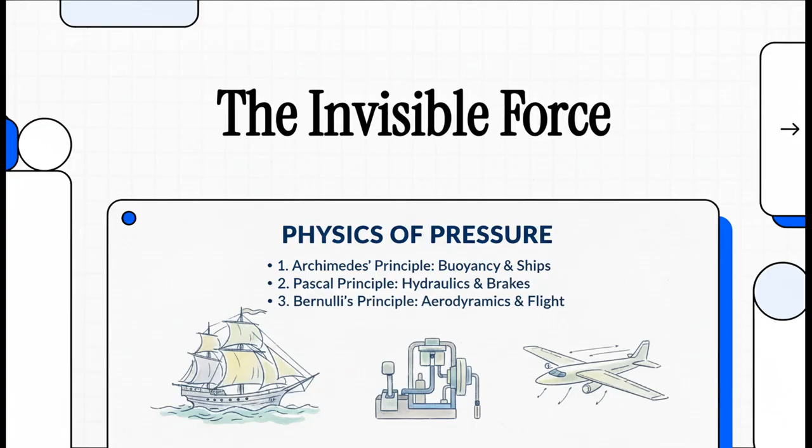Which brings us to this mind-bending question. I mean, seriously, how does a jumbo jet weighing hundreds of tons lift itself into the sky using nothing but air? It seems impossible, right? Well, it's not magic, it's physics. And by the end of this, you'll know exactly how it works.

Now, you'd think to understand flight in the thin air miles above us, we'd start in the sky. But nope, our journey actually begins deep underwater, because it's down there, where you can practically feel the weight of the water, that the basic rules of pressure become crystal clear.

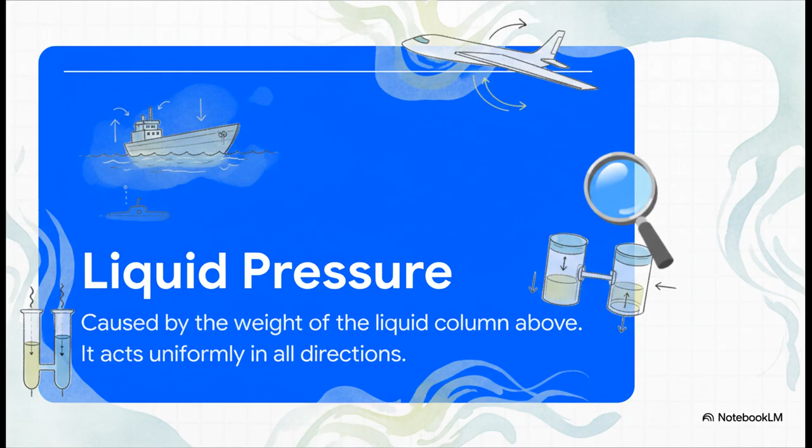So what is liquid pressure? Well, just imagine it as the weight of all the water in a column directly above a certain point. But here's the wild part. That force isn't just pushing down. At any single point, that pressure is pushing out equally in all directions. Up, down, sideways, you name it.

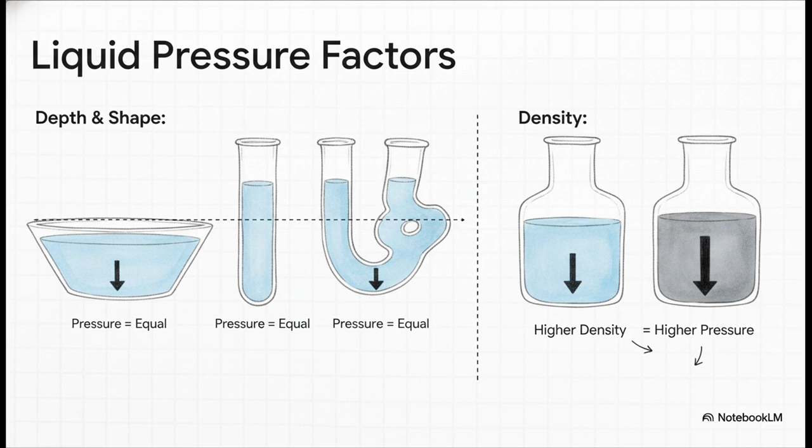Now, what's really fascinating is what doesn't affect the pressure. You'd think a huge lake would have more pressure at the bottom than, say, a skinny little tube of water, right? Wrong. It only comes down to two things: depth and density. Go deeper, the pressure builds. Use a denser liquid like mercury, and the pressure goes through the roof. The shape of the container, totally irrelevant.

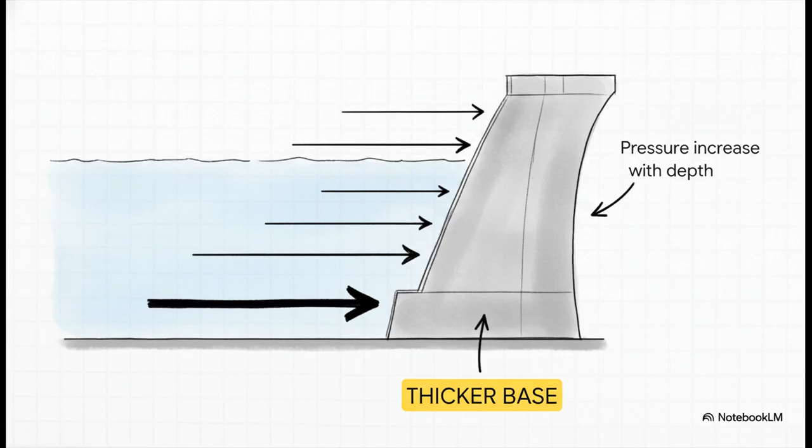And if you want a perfect real-world example of this, just look at a dam. Because the pressure gets so much stronger the deeper you go, the force pushing against the bottom of the dam is just immense. That's why engineers have to build them way, way thicker at the base just to hold all that water back.

Okay, so we have established that water has weight and it exerts pressure. But that kind of creates a puzzle. A tiny little steel bolt will sink to the bottom instantly. So how in the world can a massive ship made of thousands of tons of that exact same steel just float on the surface? The answer comes from an absolute legend from ancient Greece, Archimedes.

His big idea was actually pretty simple. When you put an object into a fluid, that fluid pushes back. We call this upward push the buoyant force, and its strength is exactly equal to the weight of the fluid that the object moved out of the way.

So it's really a tug of war between two forces, the object's weight pulling it down and the buoyant force pushing it up. If the object's weight wins, it sinks. But if the buoyant force can perfectly match the object's weight, you get a stalemate. It floats. The genius of a ship is its shape. That huge, hollow hull displaces a massive amount of water, creating a buoyant force that's strong enough to perfectly balance its own incredible weight.

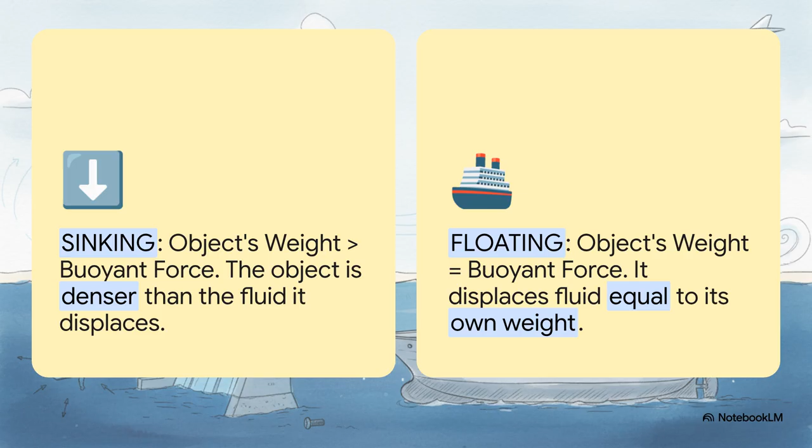All right, so we've conquered floating. Now let's move on to something that feels like a straight-up physics magic trick: multiplying force. How do you turn a small, weak push into an incredibly powerful shove? Well, it's all about our next principle of pressure. I mean, think about this for a second. How can your foot, with just a gentle push on a pedal, bring a 2-ton car to a screeching halt? You don't have super strength, but your car's hydraulic system, it kind of does.

The secret is something called Pascal's principle, and what it says is that for any fluid in a sealed system, like the brake lines in your car, if you apply pressure at one point, that pressure is transmitted instantly and equally to every other point in that fluid, no loss of power.

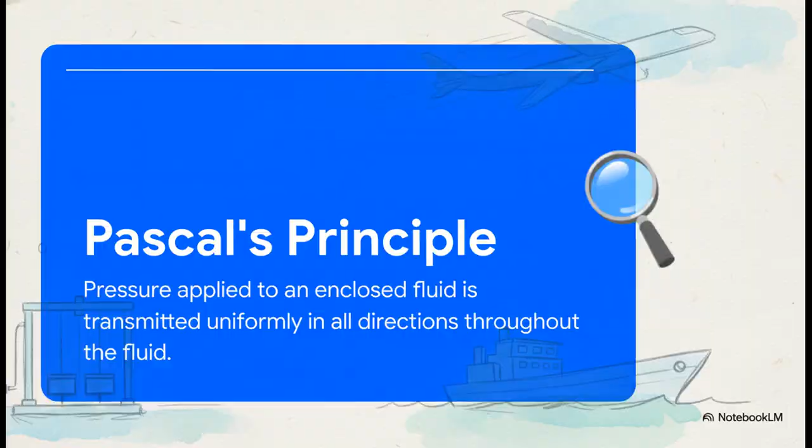And this is exactly how your brakes work. Your foot pushes a small piston, which creates pressure in the brake fluid. That pressure zips through the brake lines to much bigger pistons at the wheels. And since pressure is force spread over an area, that same pressure acting on a larger area creates a way bigger output force. It clamps the brake pads down and stops the car dead in its tracks.

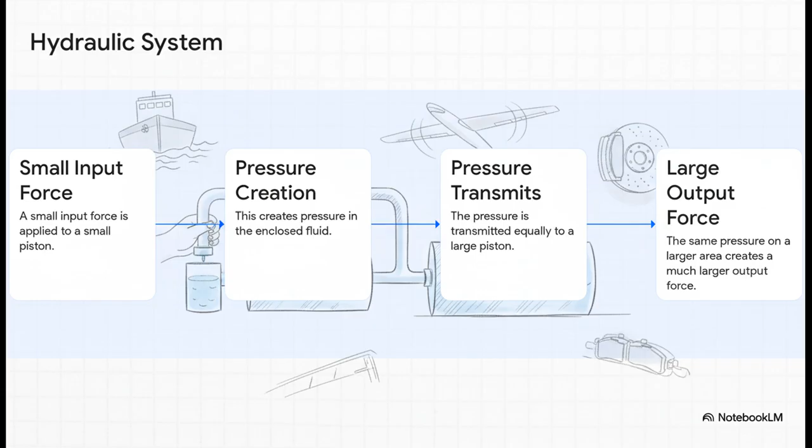This is the whole point of hydraulics. They are incredible force multipliers. A small, easy push from you can be amplified 10, 20, even 100 times on the other end. This is the powerhouse behind everything from a simple car jack to those giant construction excavators.

So we've mastered pressure in liquids, we've multiplied force. Now, let's take that knowledge up into the air. It's finally time to answer that big question we started with. What is the secret of flight? All right, the key to flying is Bernoulli's principle. And honestly, this one can bend your brain a little, so stay with me.

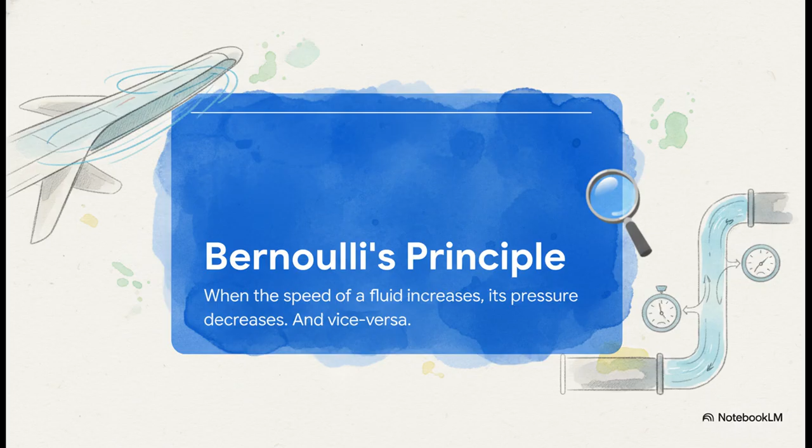For any fluid, and that includes air, it all boils down to this: the faster it moves, the lower its pressure becomes. I'll say that again. Fast-moving fluid means low pressure. Slow-moving fluid means high pressure. And an airplane wing, or an aerofoil, is basically a masterpiece of engineering designed to exploit that fact.

See how the top surface is curved and the bottom is flatter? That shape forces the air flowing over the top to travel a longer distance, which means it has to move faster than the air underneath. So what do you get? Faster air on top creates a zone of low pressure. The slower air below creates a zone of high pressure, and that pressure difference results in a powerful upward force. That, my friends, is lift.

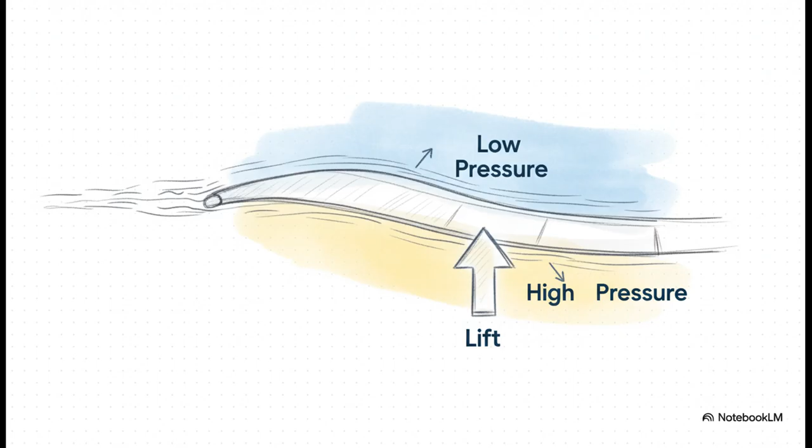And if you want the absolute best proof that this works, just flip the wing upside down. What do you get? A race car spoiler. Here, the goal is the complete opposite of lift. By making the air underneath move faster, you create high pressure on top and low pressure on the bottom. The result is a powerful downforce that literally glues the car to the track for better grip. It's the exact same principle, just inverted.

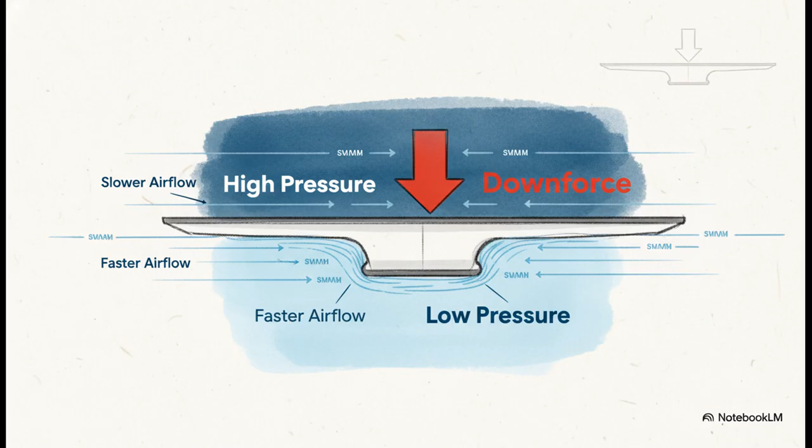Now, a lot of people make the mistake of thinking the low pressure above the wing sucks the plane up, and that's not quite right. A much more accurate way to think about it is that the high pressure zone below the wing is actively pushing the plane up toward that area of lower pressure. So lift isn't a pull from above, it's a powerful push from below.

So we have floating ships, we have hydraulic brakes, and we have airplanes that fly. Three totally different applications, but they are all connected by one constant overarching force that affects everything in our world. And that force is atmospheric pressure. It's easy to forget, but we are all living at the bottom of an invisible ocean of air. And all of that air, miles and miles of it, has weight, and it's pressing down on everything, all the time, with incredible force. This is the stage on which all these other principles play out.

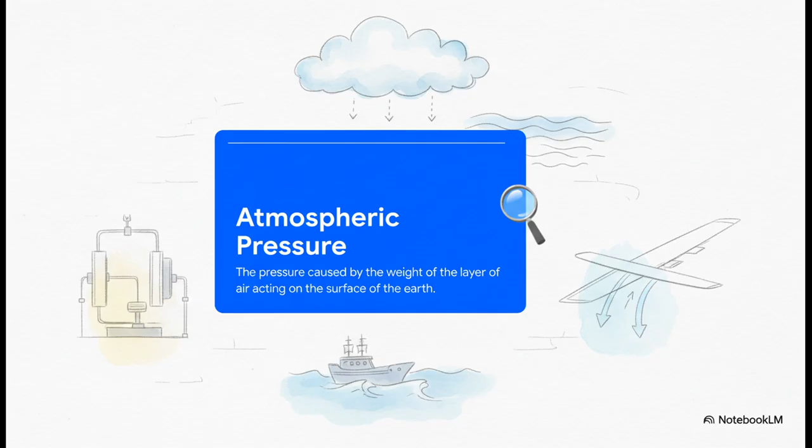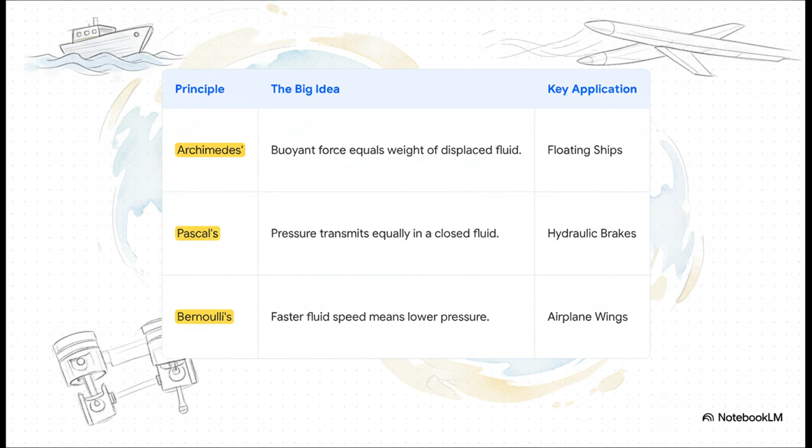So, to wrap it all up with the big ideas, you have Archimedes' principle, where buoyant force lets ships float. You have Pascal's principle, where pressure is transmitted equally, letting hydraulic brakes multiply force. And you have Bernoulli's principle, where faster fluid means lower pressure, giving us the lift that makes airplanes fly.

So from the crushing force at the bottom of the ocean to the subtle pressure difference over an airplane's wing at 30,000 feet, these fundamental laws of physics are always there, always working, and they are incredibly powerful.

And that kind of leaves us with a final thought. These amazing principles were discovered centuries ago by some brilliant people who were just paying attention. It really makes you wonder, what powerful, invisible force of nature might we be overlooking today, just waiting for someone to notice?